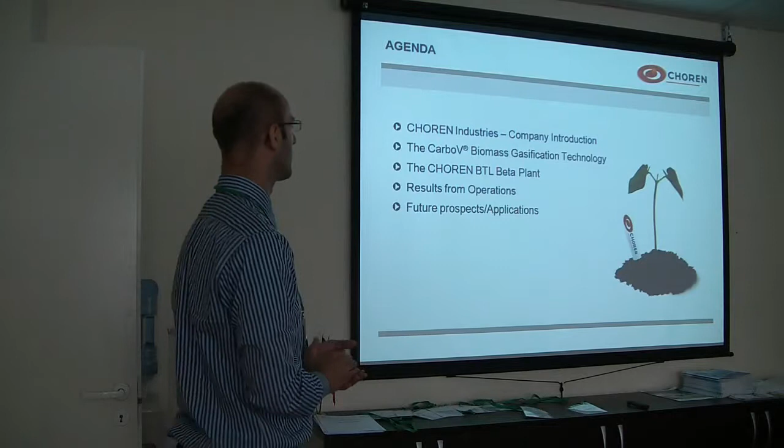I will talk about the company itself, the background, how we grew from coal gasification at Gaskombinat Schwarze Pumpe in Germany, and how we developed our own technology for biomass gasification. I will give you insight into the process itself.

We are realizing an entrained flow gasification process for solids, for biomass. As you know, it is very tricky to gasify a solid material into an entrained flow gasifier. We do this at 5 bar pressure. The challenge is to take the solid, pressurize it up to 5 bar, and then gasify it in a continuous process, not a batch process, because the later chemical synthesis needs a continuous stream of syngas.

Then I will show you the development in Germany. We have built a 45 megawatt gasification island with a Fischer-Tropsch unit, which needs up to 10 tons of biomass an hour. So when you are in Germany near Dresden, you are all very welcome to visit and have a look around. Then I'll give you some information about possible options for syngas.

We are dealing with carbons, biocarbons from biomass, hydrogen, oxygen, and we are a renewable German company. So CHOREN—this is where the name comes from.

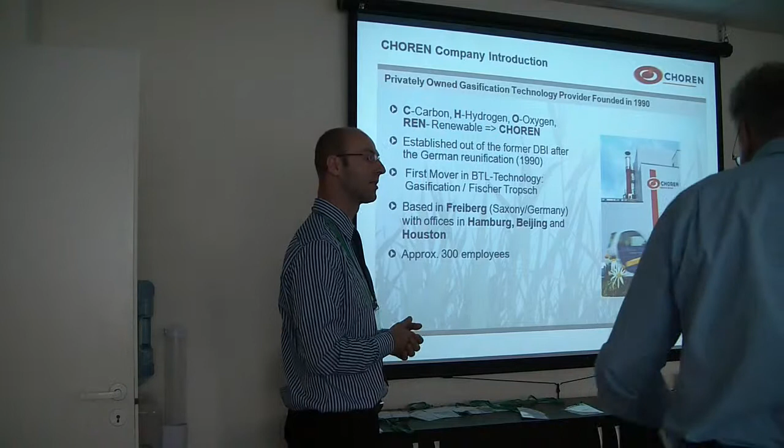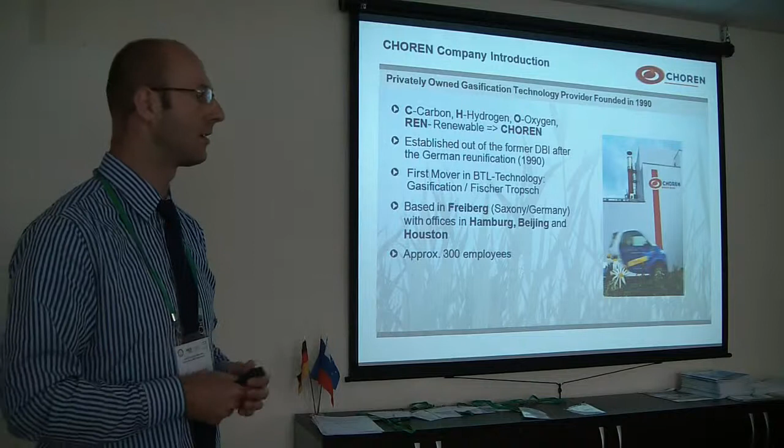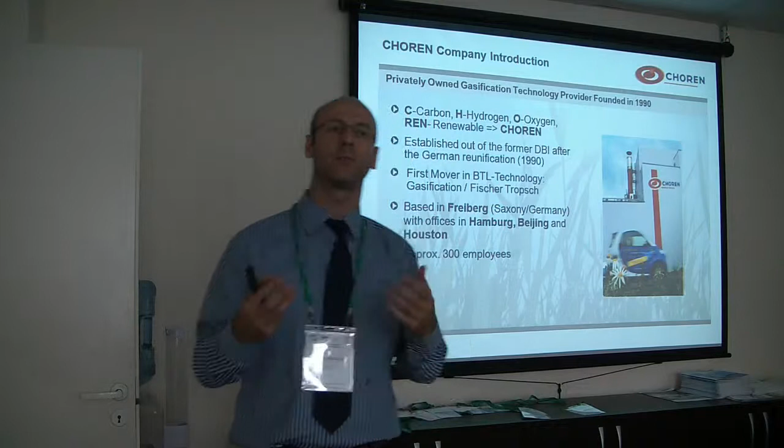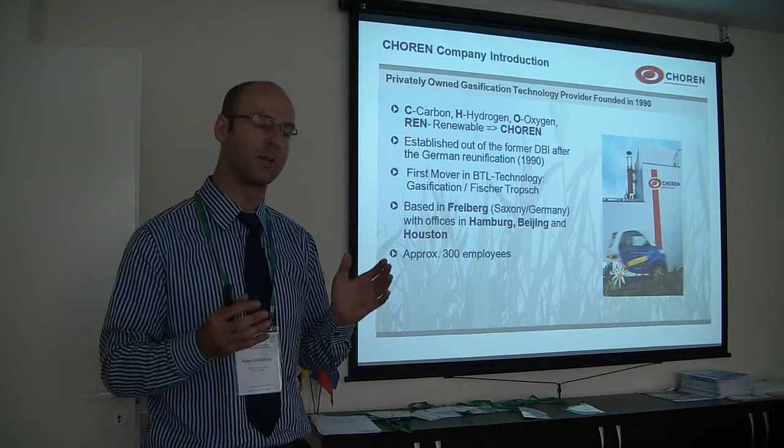We come from the former German Deutsche Brennstoffinstitut, which has a very traditional history in gasification at the Gaskombinat Schwarze Pumpe. When the company was founded after the reunification in 1990, the German automobile industry got to know that we were dealing with Fischer-Tropsch fuels, biofuels, biomass gasification. So VW, Daimler, they contacted us and showed very high interest in BTL fuels. That's why we made a strategic decision to enter the BTL market and be the first mover who owns the technology to do Fischer-Tropsch fuels.

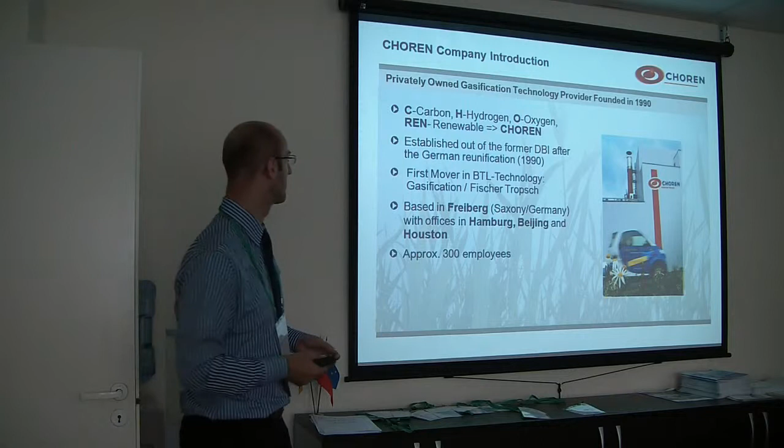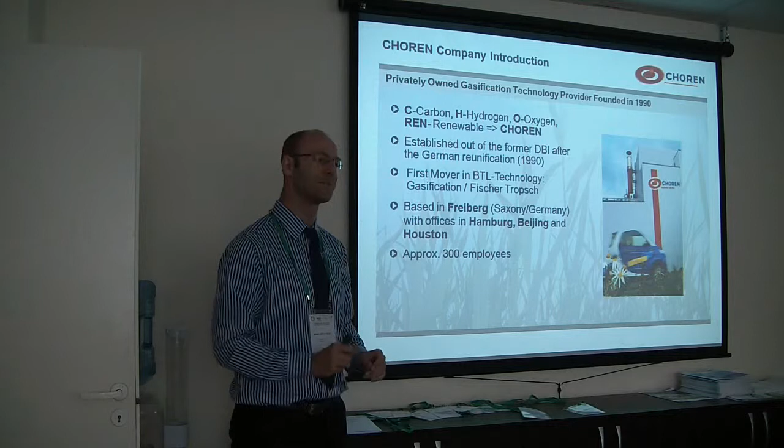Do you know where Freiberg is located? If you have a picture of Berlin, maybe 200 kilometers south is Dresden, and just between Chemnitz and Dresden is a very little, very neat town of 50,000 inhabitants—it's the Silicon Valley of gasification. Siemens is there, many gasification technology providers are there, and you probably know the Technical University, the Bergakademie Freiberg, which is quite famous. This town will have an 850 year history next year, so maybe you can come also to visit and share the party. We have 300 employees.

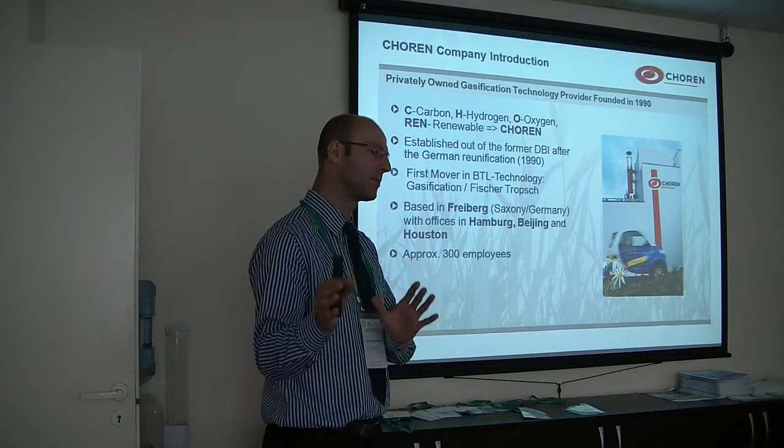We have an office in Houston and in Beijing. For the coal gasifier, we see a huge market in China, so that's why we have an office in Beijing.

This is pretty much the structure of the company. The 2 offices—you have to be real near to the clients—so we have the office for Chinese clients for coal gasification, and for the markets in America, the Houston office. We also have the Beta plant, the fuel production company in this group, and we have little components, a factory shop to produce the burners and all the core equipment for our technology.

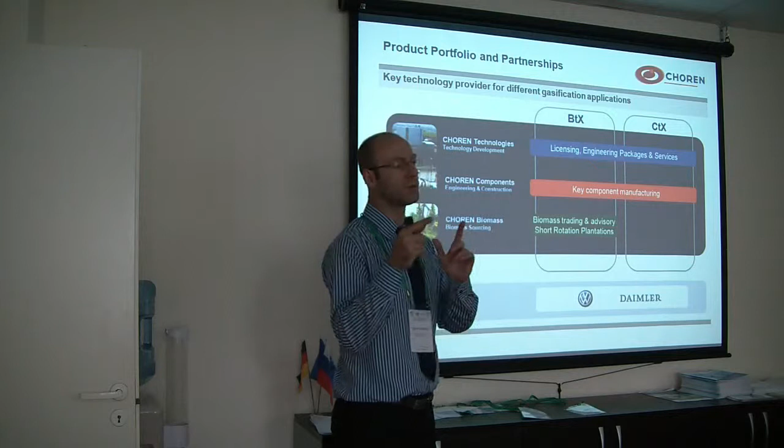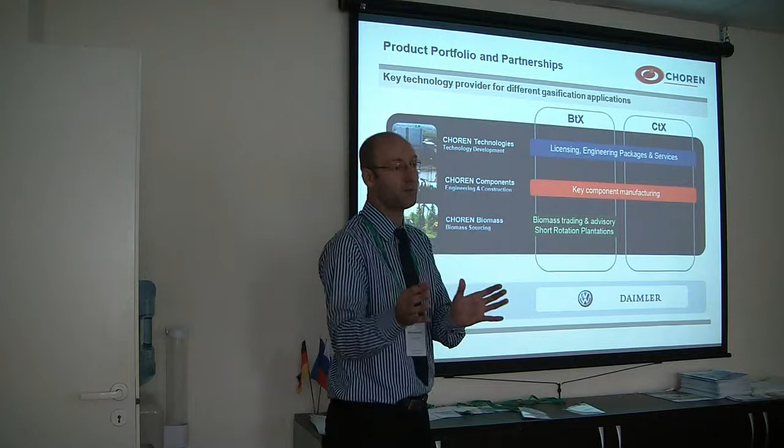The company is in private hands, with only a little share for the automobile branch, up to maybe 11%. What we are doing is offering engineering packages, licenses for BTX and CTX technologies. We are manufacturing, and this is maybe one difference to other companies—you can produce in your country. This is what we say to our clients: all the things you want, you can get. We want to produce only the conveying systems and the burners, the key equipment. As long as we have an EPC who cares about your project, we can play a very big role or just a very small role depending on the project scale.

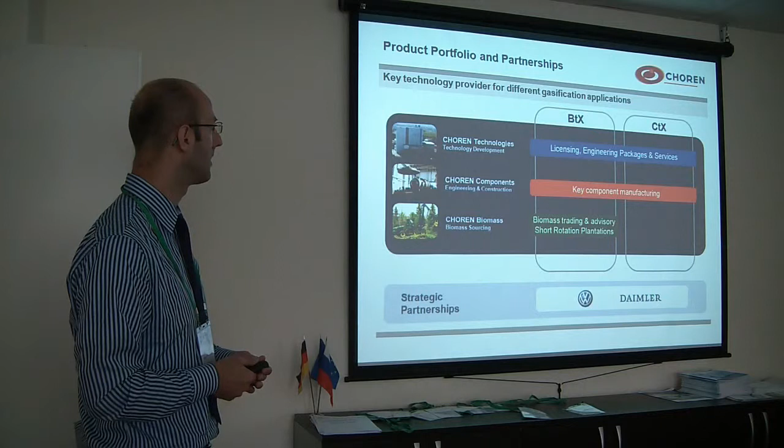We also have a biomass division which deals with biomass. I will show you some pictures. As I said, we took the Schwarze Pumpe gasifier...

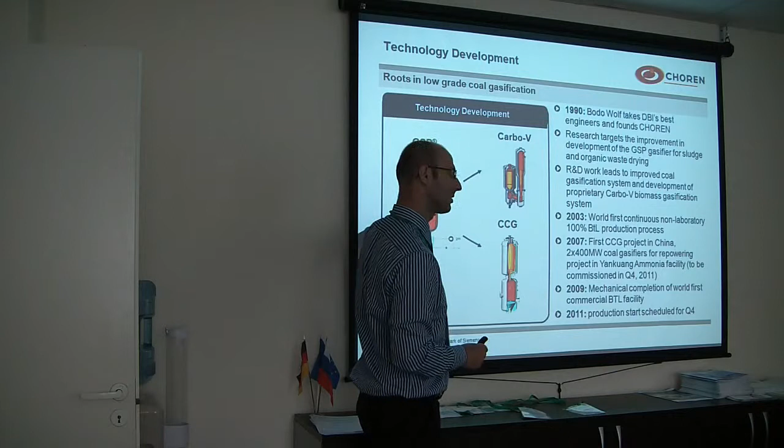We moved into a modified coal gasifier, which is our CCG gasifier—an entrained flow coal gasifier which operates on dry dust. It also took us maybe 20 years to shape a Carbo-V process for solid biomass gasification.

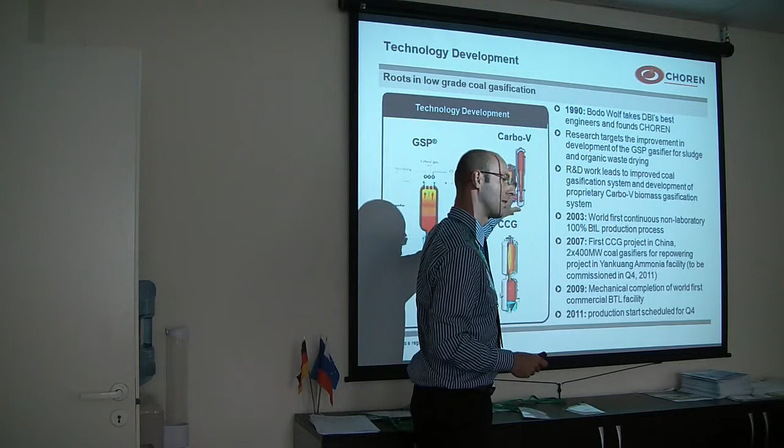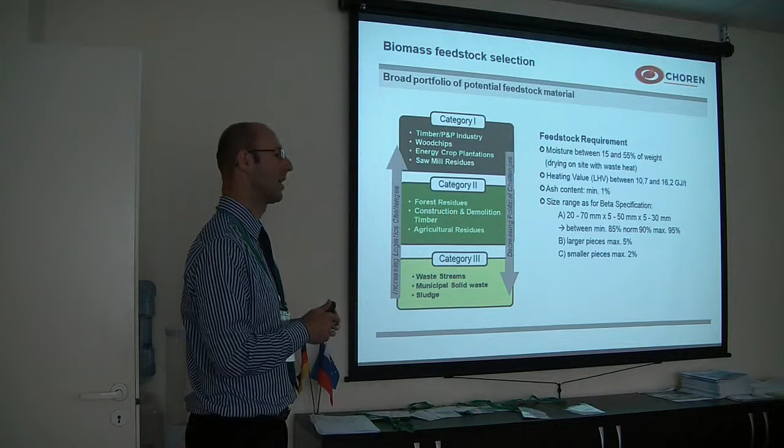For the biomass gasification process, people will ask first: what kind of solids or what kind of biomass can you gasify? We would like category 1, which is timber, pulp and paper, industry waste, wood chips, energy crop plantations, sawmill residues. If you don't have 100% category 1, you can move down to category 2: forest residues, timber, agricultural residues. We have to take care of 2 parameters within the process: an exact look at the ash content in the biomass, and a look at the ash melting behavior.

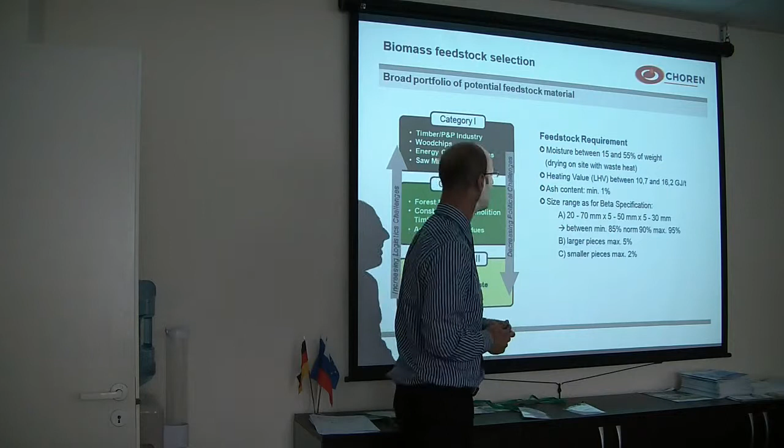Depending on those 2 parameters, we can have a mixture of biomass. On the right side, you can see some feedstock requirements we have for our Beta plant. For the Beta plant, we have 2 streams: one is waste wood, which is already dry.

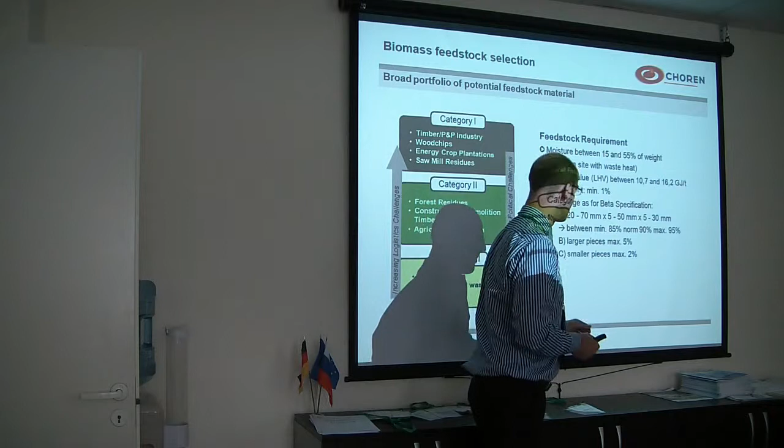We do not need to dry it. The other half is from the Saxony forest. It needs to be dry within the plant, and we have a share of 50-50. The size is—I could not bring some samples—but it's maybe a little bit bigger than your phone, a little bit bigger than a business card, so just wood chips.

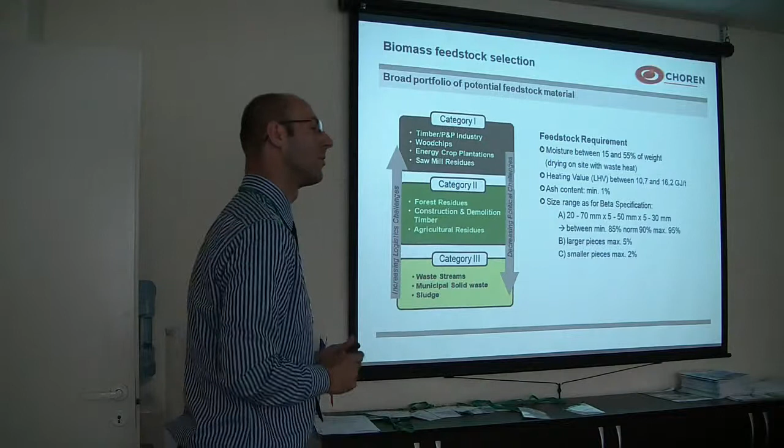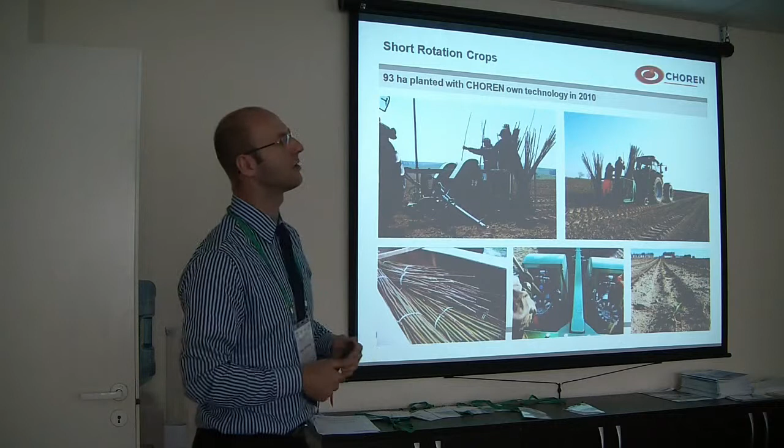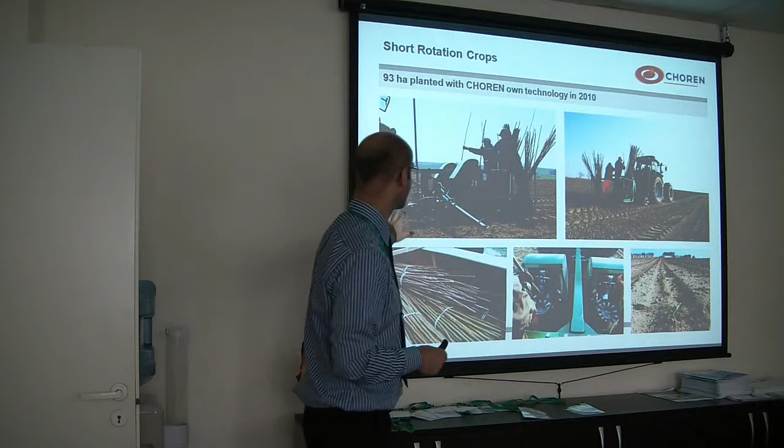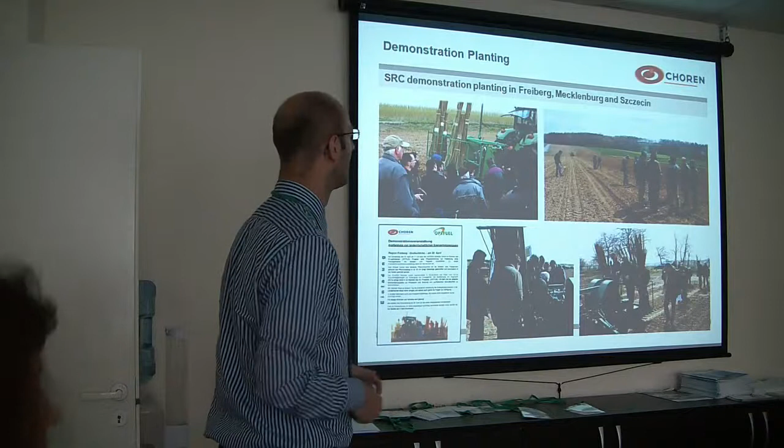Now we can go on to the next slide. This is near Freiberg, some demonstration. It goes really quick—the truck is going, and it's planting really quick. Now you can see on the next pictures some results.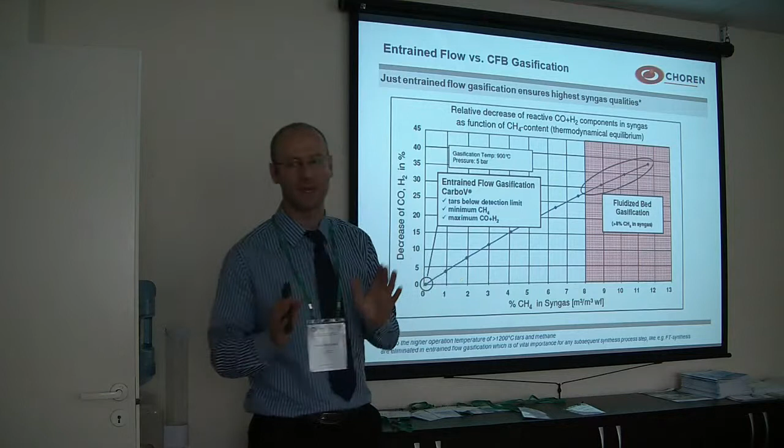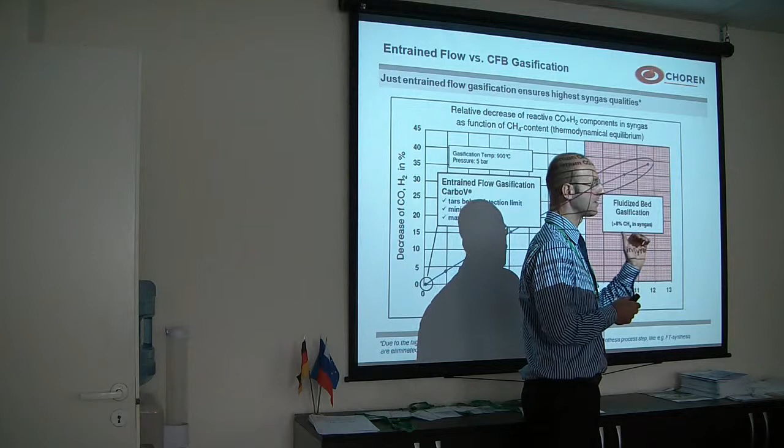Okay, why we are doing entrained flow gasification—and now it's maybe more technical—this is the answer. There are fluidized bed gasifiers, there are moving bed gasifiers, but in different processes you have a different syngas composition, and if you want to go to chemical synthesis, the question is how rich of hydrogen and CO is your syngas. If you use fluidized bed gasification, you will have, as you can see on this axis, up to 13 or up to 15% methane in your syngas and a low number of reactive components.

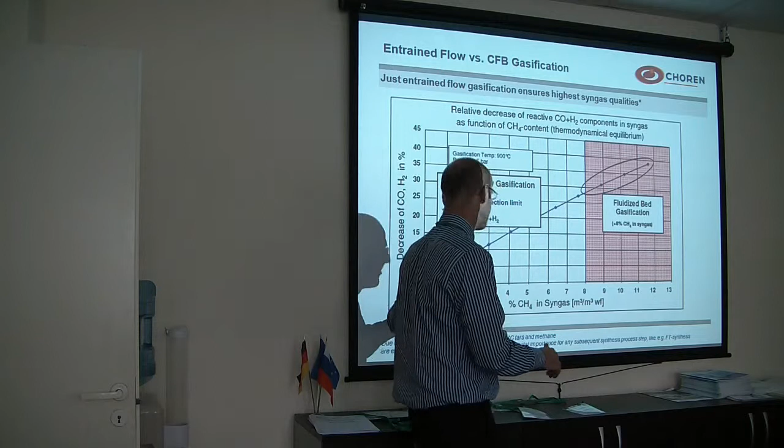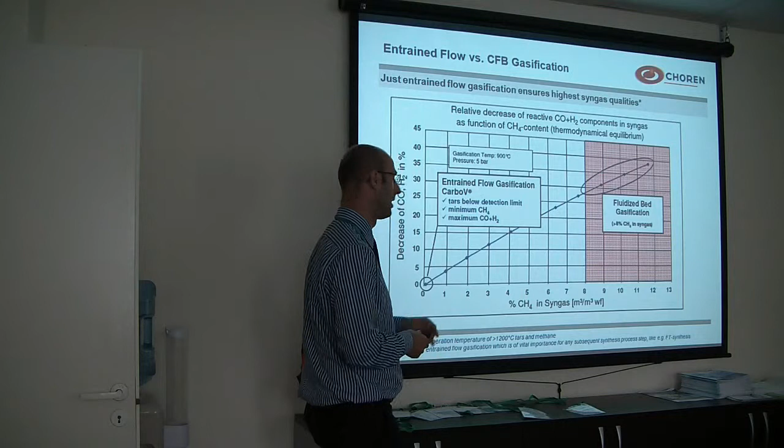If you go to entrained flow gasification, which is at a high temperature level and a certain pressure, you will reduce your methane content in your syngas. And if you do this in the entrained flow gasification process at a pressure level of 5 bar, you can reach almost zero. This means with the high temperature, your tars are very low in the syngas. It's a very, very clean syngas with a composition of up to 80% H2 and CO, with almost no methane in this syngas. Then we can go on to the next slide.

This is maybe the main part of this presentation, the view on the process. I will guide you through real quick so you can get most of the information. So at the very beginning we have the solids.

In the first step we have a reactor which is a pyrolysis reactor. It has a reaction time of up to 20 minutes, and what we want to do with this first step is to make from the solid a gas. You will have, after this process which operates at up to 500 degrees Celsius, a pyrolysis gas, and depending on your composition of the biomass, up to 20 mass percentage of biochar.

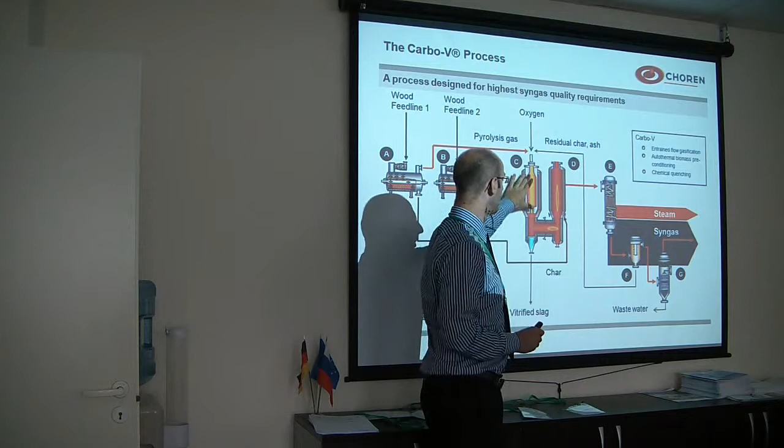We then go to the next step of the high temperature gasification process. You can beautifully gasify a gas in an entrained flow gasification process. We are doing this at a very high temperature level of 1700 degrees. Then the syngas goes to the quencher—if you look at a coal gasifier, they use a water quencher where you lose efficiency—but we use this biochar to cool down the syngas.

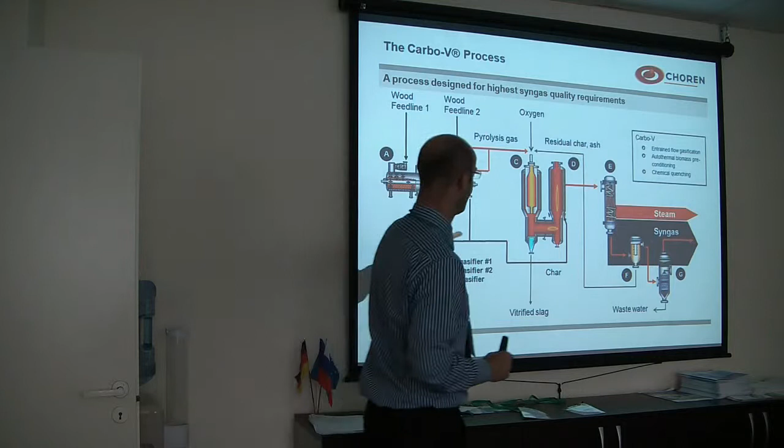And if you have a look at the amount of biocarbons from your biomass, 99.9% of the biocarbons from your biomass go into the syngas. So this is one important thing. Due to the high temperature, the syngas is very, very clean—no tars in it, we cannot detect any tars. And then you have a very, very beautiful glass slag, which is one waste stream down here.

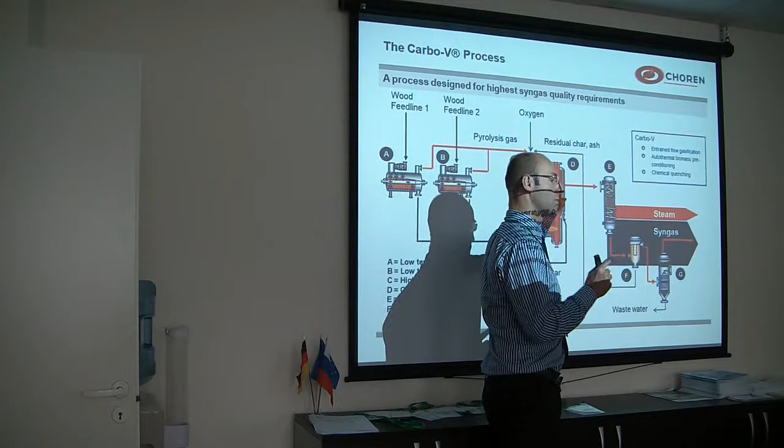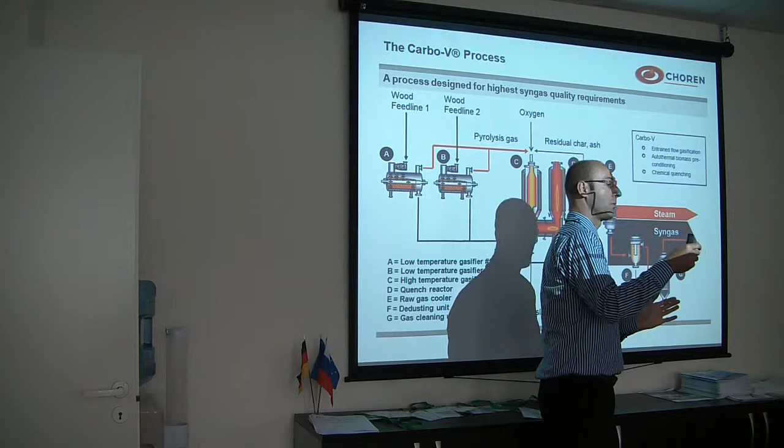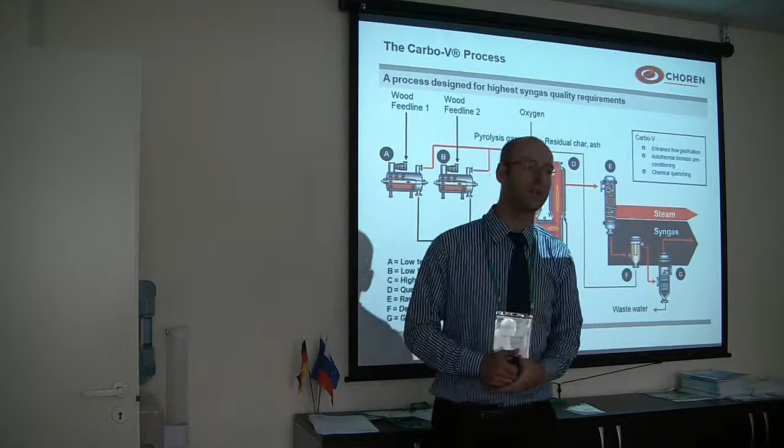Then you go further after the quencher—you may have little particles of ash, and of course the biochar, which goes with the stream. This is this one right here. After the quencher, we take everything which goes out of it with the syngas. We take all the carbons again and bypass them also to the gasifier. So you will never lose your bio-green carbons in this process, and this is a very, very nice thing.

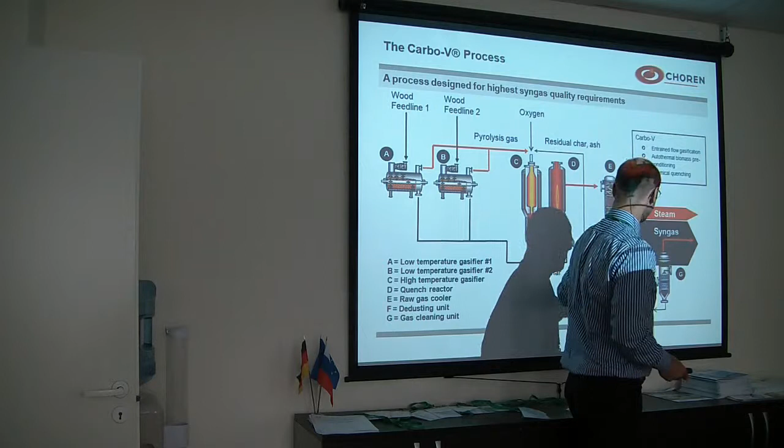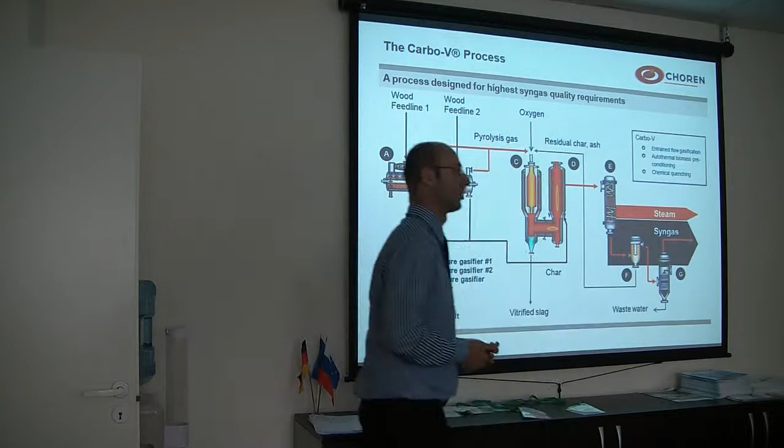Of course, it's a heat source. We use this heat source for biomass drying in this process, and later on you can have your synthesis, whatever you want to have. So basically 3 steps: we make the solids a gas; of course, you have biochar, and we use all the carbons into the high temperature gasifier to use all carbons; we have high temperature, no tars, a beautiful syngas. Now we can go on to the next slide.

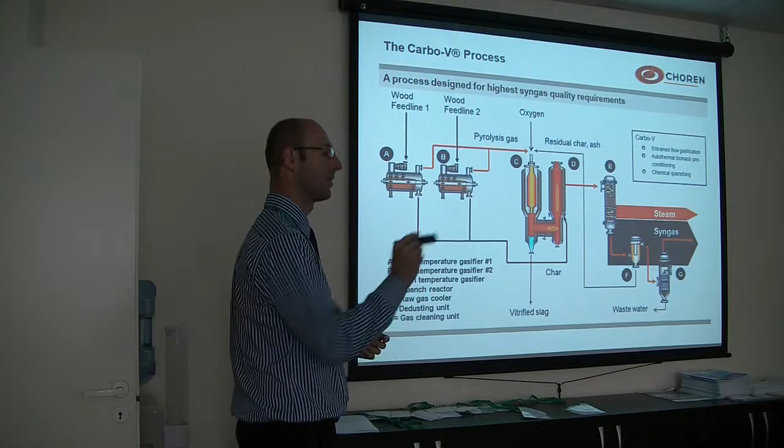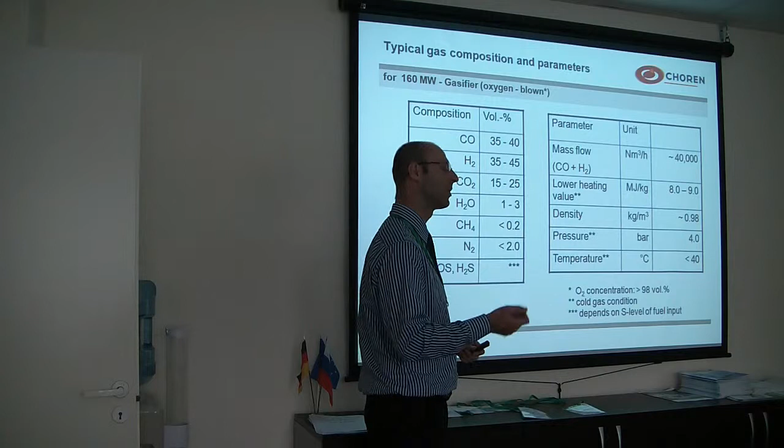You can see an extract of the syngas. So you will not find a process where you can achieve over 80% reactive components in your syngas, and a very, very low methane content. And of course, operating on oxygen, depending on the purity of your oxygen, your nitrogen is then also very low. We can go to...